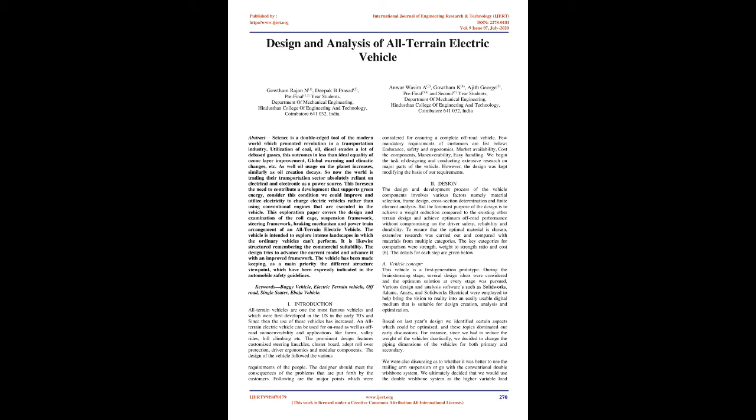A. Vehicle concept. This vehicle is a first-generation prototype. During the brainstorming stage, several design ideas were considered and the optimum solution at every stage was pursued. Various design and analysis softwares such as SolidWorks, Adams, ANSYS, and SolidWorks Electrical were employed to help bring the vision to reality in an easily usable digital medium that is suitable for design creation, analysis, and optimization. Based on last year's design, we identified certain aspects which could be optimized, and these topics dominated our early discussions. For instance, since we had to reduce the weight of the vehicle drastically, we decided to change the piping dimensions of the vehicle for both primary and secondary members.

We were also discussing whether it was better to use the trailing arm suspension or go with the conventional double wishbone system. We ultimately decided to use the double wishbone system, as the higher variable load bearing benefits of the double wishbone system outweighed the lightweight trailing arm suspension system. Since the vehicle had to be operated in rough conditions, the double wishbone system was deemed necessary. We also brainstormed and came to the conclusion to use an Ackerman steering system as an understeer, since we operated at relatively low speeds and the slip angle was reduced. This gives greater maneuverability to the driver. The CAD model is shown in Fig 1.

B. Frame. The chosen design is a tubular space frame composed of a combination of two sets of tube members. The primary members are made entirely of 1.25 OD and 1.65 mm thickness, whereas the secondary members are made up of 1 OD and 1.65 mm thickness. These tubes were carefully chosen keeping in mind that they had to satisfy the bending strength requirements. The decision for choosing two sets of tube members was motivated by the fact that it results in significant weight reduction compared to the previous year's design, which employed the 1 OD for both primary and secondary members at thickness of 3 mm and 1 mm.

The tubing varies across the chassis depending upon the severity and various possible failure modes. After finalizing the frame along with its material and cross-section, it is very essential to test the validity, strength, and deformation of the frame in its worst-case scenario. The frame should withstand the impact, rollover conditions and provide utmost safety to the driver. Following tests were performed on the roll cage.

C. Material selection. The material for the members was chosen as AISI 4130 chromoly steel since it offers high tensile strength, excellent ductility, high impact strength, corrosion resistance, and good weldability at a reasonable price and availability. Even though it may not be lighter than other steels, it is stronger and hence we can use less. To improve its strength, it was normalized before its usage.

D. Chassis design. A nose design was adopted in order to enhance driver ergonomics. This design reduces blind spots in the front position of the car for the driver and increases his field of view. In the previous year a non-nose design was used. But in order to make the roll cage more compact, the nose design was implemented. When compared to the non-nose design, the nose design has fewer individual members, making the nose design easier to manufacture as it will require the least cutting and welding of individual tubes. Discrete view section of design is shown in Fig 2, Fig 3, Fig 4, Fig 5.

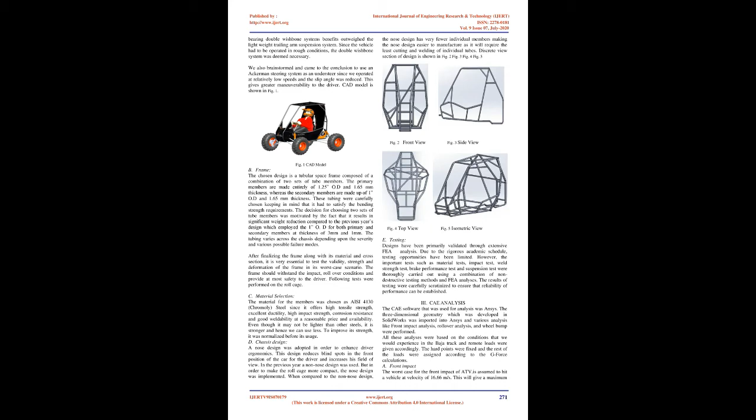3. CAE Analysis. The CAE software that was used for analysis was ANSYS. The three-dimensional geometry which was developed in SolidWorks was imported into ANSYS and various analyses like front impact analysis, rollover analysis, and wheel bump were performed. All these analyses were based on the conditions that we would experience in the Baja track and remote loads were given accordingly. The hard points were fixed and the rest of the loads were assigned according to the G-force calculations.

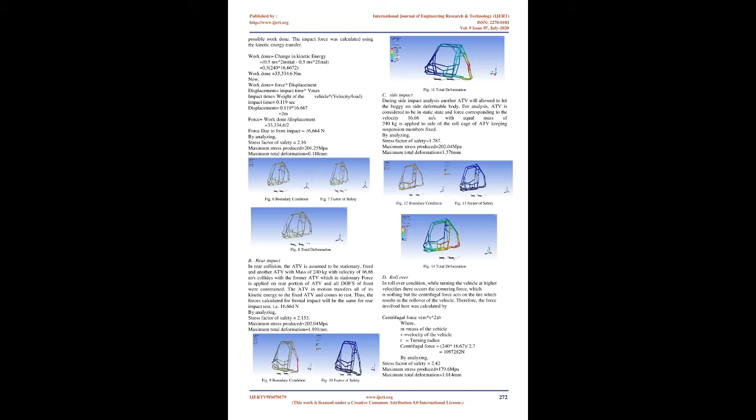A. Front impact. The worst case for the front impact of an ATV is assumed to hit a vehicle at velocity of 16.66 m/s. This will give a maximum possible work done. The impact force was calculated using the kinetic energy transfer. Work done equals change in kinetic energy equals 0.5 mv² initial minus 0.5 mv² final, equals 0.5 × 240 × 16.667², work done equals 33,334.6 Nm. Now, work done equals force × displacement, impact time × Vmax. Impact time equals weight of the vehicle × velocity / load, impact time equals 0.119 sec.

Displacement equals 0.119 × 16.667 equals 2 m. Force equals work done / displacement equals 33,334.6 / 2, force due to front impact equals 16,664 N. By analyzing: stress factor of safety equals 2.16. Maximum stress produced equals 201.25 MPa. Maximum total deformation equals 0.188 mm.

B. Rear impact. In rear collision, the ATV is assumed to be stationary, fixed, and another ATV with mass of 240 kg with velocity of 16.66 m/s collides with the former ATV which is stationary. Force is applied on rear portion of ATV and all DOFs of front were constrained. The ATV in motion transfers all of its kinetic energy to the fixed ATV and comes to rest. Thus, the forces calculated for frontal impact will be the same for rear impact test, i.e.

16,664 N. By analyzing: stress factor of safety equals 2.153. Maximum stress produced equals 202.04 MPa. Maximum total deformation equals 1.891 mm.

C. Side impact. During side impact analysis another ATV is allowed to hit the buggy on the side deformable body. For analysis, ATV is considered to be in static state and force corresponding to the velocity 16.66 m/s with equal mass of 240 kg is applied to side of the roll cage of ATV keeping suspension members fixed. By analyzing: stress factor of safety equals 1.787. Maximum stress produced equals 202.04 MPa. Maximum total deformation equals 1.376 mm.

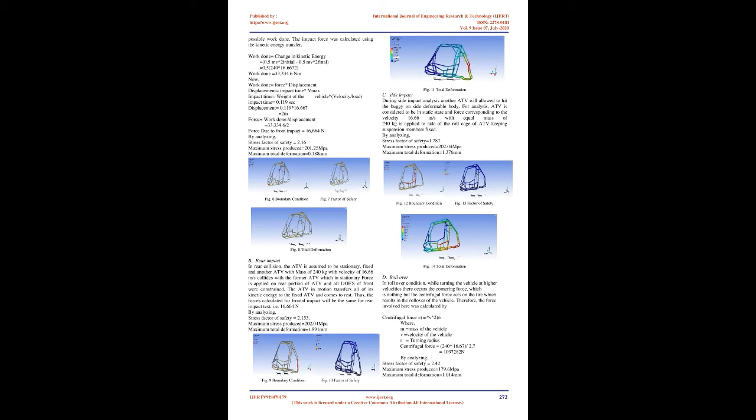Initially there was an inclination toward using a trailing arm during initial discussions, but we decided against it as we came to the conclusion that it would not be able to withstand the variable heavy loads. Eventually, a decision was made in favor of an independent double wishbone suspension system. This is mainly due to the system's proven success in off-road applications, along with its flexibility with regard to wheel movement and critical suspension geometry characteristics.

A. A-arms. All the A-arms were fabricated from 4130 seamless steel tubing by a combination of notching and welding. The mounting points were fixed at the design stage using SolidWorks software. The upper front and rear A-arm mounts were specially laser cut in order to reduce weight by avoiding extra members for mounting. The designs for the lower and upper A-arms at the front and rear were comprehensively evaluated under a variety of loading conditions. This was done to ensure that they hold up even under the most extreme driving conditions.

B. Shocks. The shock absorbers used in the vehicle are Fox Racing air shocks. These shocks were preferred for their bump and rebound damping adjustment at low as well as high speeds. The shocks also feature a wide range of spring rates. Due to the uneven distribution of weights between the front and the rear portions of the vehicle, the stiffness of the rear shock absorbers has been kept higher than that of the front. Both sets of shocks have a maximum travel of 8.5. This facilitates better maneuverability under all driving conditions.

C. Uprights. A lot of thought was put into the material for the uprights. There were plenty of discussions whether to use cast iron or aluminum. Aluminum is a ductile material and has very high shear strength. It is lightweight and strong. Compared to cast iron, it can be easily machined. The wastage while machining is also very less in aluminum. Since cost was not going to be a problem this time around, since we covered the expenses, we decided to opt for aluminum.

Taking into consideration parameters like steering geometry, suspension geometry, heat dissipation, and dynamic and static stress acting on the uprights, we designed the uprights in SolidWorks and analyzed the forces acting on them in ANSYS. We used AL 7075 for the uprights, and based on our groundwork we felt the 7 series would be more apt than the 6 series. We used in-house fabrication and machined an aluminum block using CNC.

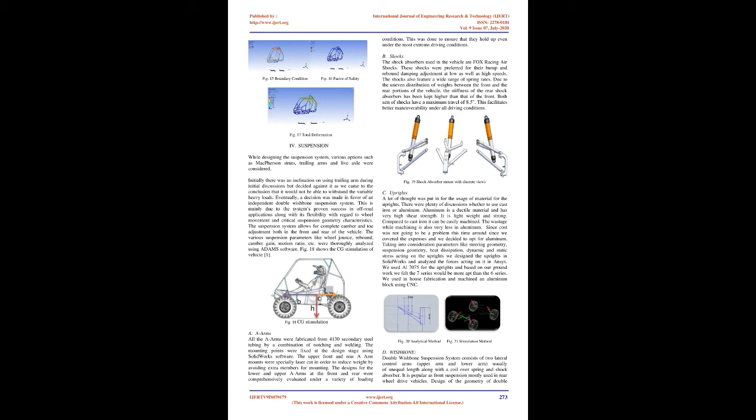E. Analysis of wishbones. Analysis of wishbones in ANSYS analysis software is necessary in order to determine the induced maximum stress and maximum deflection in wishbones. For analysis, wishbones first need to be modeled in software. The modeling of wishbones is done in SolidWorks modeling software. ANSYS is engineering simulation software, computer-aided engineering. Various types of analysis like structural analysis, thermal analysis, etc., are possible using ANSYS analysis software.

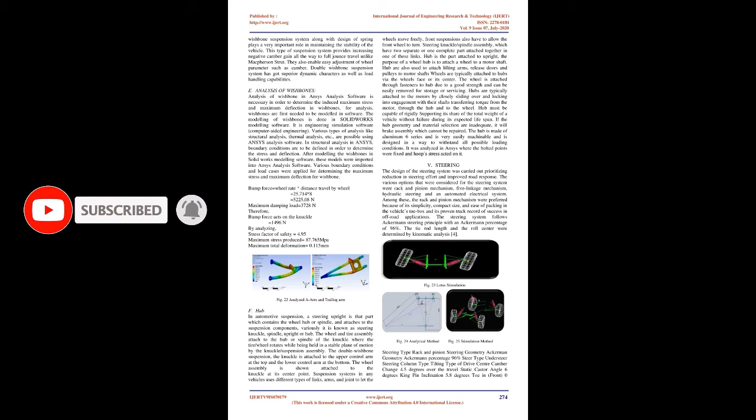In structural analysis in ANSYS, boundary conditions are to be defined in order to determine the stress and deflection. After modeling the wishbones in SolidWorks modeling software, these models were imported into ANSYS analysis software. Various boundary conditions and load cases were applied for determining the maximum stress and maximum deflection for the wishbone.

Bump force equals wheel rate * distance traveled by wheel, equals 25,714 * 8, equals 5225.08 N. Maximum damping load equals 3728 N. Therefore, bump force acting on the knuckle equals 1496 N. By analyzing, stress factor of safety equals 4.95. Maximum stress produced equals 87.765 MPa. Maximum total deformation equals 0.115 mm.

F. Hub. In automotive suspension, a steering upright is that part which contains the wheel hub or spindle and attaches to the suspension components. Variously it is known as steering knuckle, spindle, upright or hub. The wheel and tire assembly is attached to the hub or spindle of the knuckle, where the tire/wheel rotates while being held in a stable plane of motion by the knuckle/suspension assembly.

In the double wishbone suspension, the knuckle is attached to the upper control arm at the top and the lower control arm at the bottom. The wheel assembly is shown attached to the knuckle at its center point. Suspension systems in any vehicle use different types of links, arms, and joints to let the wheels move freely. Front suspensions also have to allow the front wheel to turn. The steering knuckle/spindle assembly has two separate parts or one complete part attached together in one of these links.

The hub is the part attached to the upright. The purpose of a wheel hub is to attach a wheel to a motor shaft. Hubs are also used to attach lifting arms, release doors, and pulleys to motor shafts. Wheels are typically attached to hubs via the wheel's face or its center. The wheel is attached through fasteners to the hub due to good strength and can be easily removed for storage or servicing. Hubs are typically attached to the motors by closely sliding over and locking into engagement with their shafts, transferring torque from the motor, through the hub into the wheel.

The hub must be capable of rigidly supporting its share of the total weight of a vehicle without failure during its expected lifespan. If the hub geometry and material selection are inadequate, it will break the assembly, which cannot be repaired. The hub is made of 6 series aluminum, is very easily machinable, and is designed to withstand all possible loading conditions. It was analyzed in ANSYS where the bolted points were fixed and hoop stress acted on it.

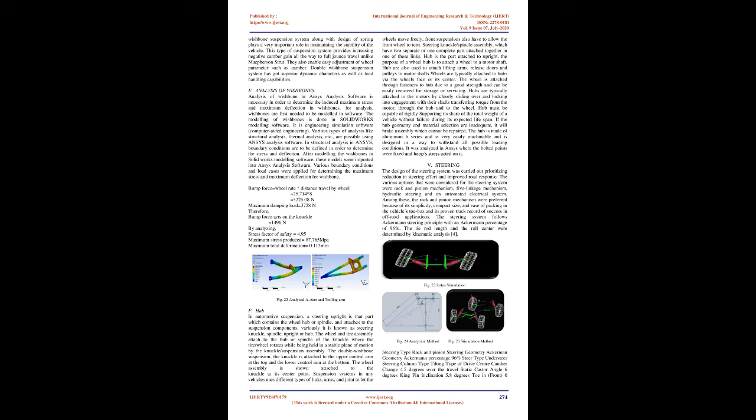The tie rod length and the roll center were determined by kinematic analysis. Steering type: rack and pinion. Steering geometry: Ackermann, percentage 96%. Steer type: understeer. Steering column type: tilting. Type of drive: center. Camber change: 4.5 degrees over the travel. Static caster angle: 6 degrees. Kingpin inclination: 5.8 degrees. Toe in, front: 0 degrees. Scrub radius: 60 mm. Turning radius: 2.5 m to right. Effective rack length: 355 mm. Power assist: no.

2.6 Brakes. While designing the brake system for the vehicle, the team considered two major systems. One system consisted of using a single tandem master cylinder with 2 cylinders and pistons with a pressure regulating valve, PRV, positioned across the hydraulic lines. The second system consisted of using a dual master cylinder arrangement with 2 separate master cylinders, each forming a separate hydraulic circuit. A bias bar or balance bar performs the role of a PRV in this system, mechanically dividing the brake force across each master cylinder depending on predetermined bias requirements. Of the two options, the second option was preferred.

This is because, compared to a tandem master cylinder, a dual master cylinder arrangement reduces driver effort at the pedal, thereby minimizing driver fatigue. Also, the system offers an inherent safety interlock, wherein even if one hydraulic circuit fails, the other cylinder remains in an operable condition. Another disadvantage of a tandem master cylinder is its requirement of a PRV to create the necessary braking bias. A PRV is positioned along the hydraulic lines. While adjusting a PRV, it is very possible that air may enter the hydraulic circuits, diminishing braking performance, or under extreme circumstances, it may even compromise the braking system.

In a dual master cylinder arrangement, the brake bias can be adjusted mechanically using a bias bar or a balance bar. Since the tires have positive scrub radius, a horizontal split-type brake circuit has been preferred. Hence, one master cylinder will control the front braking circuit and the other will control the rear braking circuit. A. Master cylinders. The bore size of the cylinders has to be as small as possible in order to provide large hydraulic pressure in the circuit at minimal brake effort. At the same time, the cylinder must also be able to withstand the applied pressure. To achieve a balance between the two factors, 2 Wilwood aluminum master cylinders with 5/8 inch bore diameter were preferred.

B. Calipers. While selecting the type of caliper to be used, there were 2 major considerations for the team. One option was to use a fixed type caliper with cylinders and pistons on both sides of the brake pads. Such a caliper would offer strong braking performance, but at the expense of increased driver effort and increased unsprung mass of the vehicle.

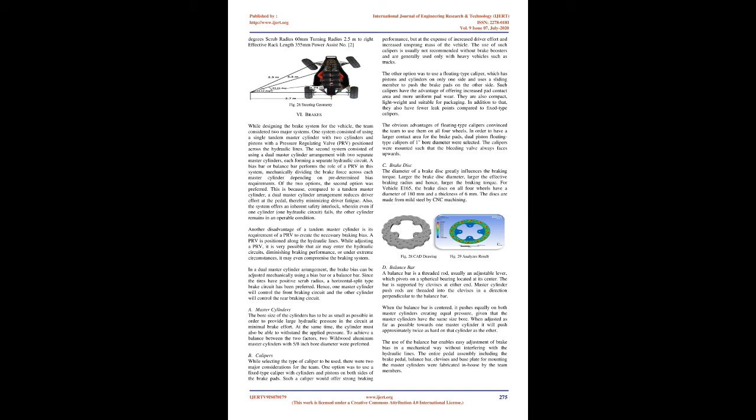C. Brake disc. The diameter of a brake disc greatly influences the braking torque. Larger the brake disc diameter, larger the effective braking radius and hence, larger the braking torque. For vehicle E165, the brake discs on all 4 wheels have a diameter of 180 mm and a thickness of 6 mm. The discs are made from mild steel by CNC machining.

D. Balance bar. A balance bar is a threaded rod, usually an adjustable lever, which pivots on a spherical bearing located at its center. The bar is supported by clevises at either end. Master cylinder push rods are threaded into the clevises in a direction perpendicular to the balance bar. When the balance bar is centered, it pushes equally on both master cylinders creating equal pressure, given that the master cylinders have the same size bore.

When adjusted as far as possible towards one master cylinder it will push approximately twice as hard on that cylinder as the other. The use of the balance bar enables easy adjustment of brake bias in a mechanical way without interfering with the hydraulic lines. The entire pedal assembly including the brake pedal, balance bar, clevises and base plate for mounting the master cylinders were fabricated in-house by the team members.

7. Powertrain and electricals. The team has used the e-kit components provided by Compage Automation Systems. These components include a lithium battery pack consisting of 4 packs of cell each of 2.6 Ah/3.7 V, a DC motor, a controller, a main contactor, a low voltage and a high voltage harness, an FNR switch, an accelerator pedal, a brake switch, a universal coupling, a charging unit and a single-stage reduction gearbox with a reduction ratio of 12:1. The gearbox can be directly mounted with the motor. A CV joint is provided at the output of the gearbox integrated with it.

8. Operations involved in vehicle. The batteries are from the outset totally energized and a while later they are connected with a motor for discharging. This helps with keeping the battery discharged reliably. This is moreover done, as the efficiency of the brushless DC motor is around 85 to 90%. Subsequently, under this condition the battery gets totally de-energized. From the start the supply is given through the controller to the motor. It takes a high starting current to push the wheel to move forward.

The vehicle is around 180 kilograms barring the driver, it can reach up to 40 kilometers per hour speed at the best. The batteries get discharged reliably, consequently it gives the endurance race to the vehicle. Vehicle is absolutely depending upon the driver's control on the throttle pedal to vary speed. As the speed varies the current similarly fluctuates. In this way, the speed variation must be low to keep the battery alive for the longest duration of time.